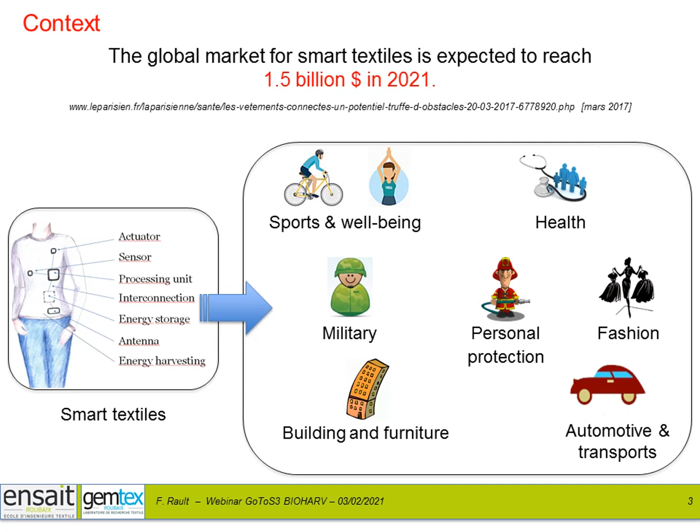The context of the development of PVDF-based textile structures is linked to the development of smart textiles and its economic interest. This market should reach $1.5 billion this year. Smart textiles are textiles able to interact with their environment. Among these smart textiles, some integrate electronic components that require energy. These smart textiles find application in various fields such as sports, well-being, health, personal protection, fashion, building, automotive and transports.

Smart textiles are developed to provide new functionalities. These textiles can monitor different signals, they can heat, communicate, or emit light. To achieve this, these textiles must be supplied with electrical energy.

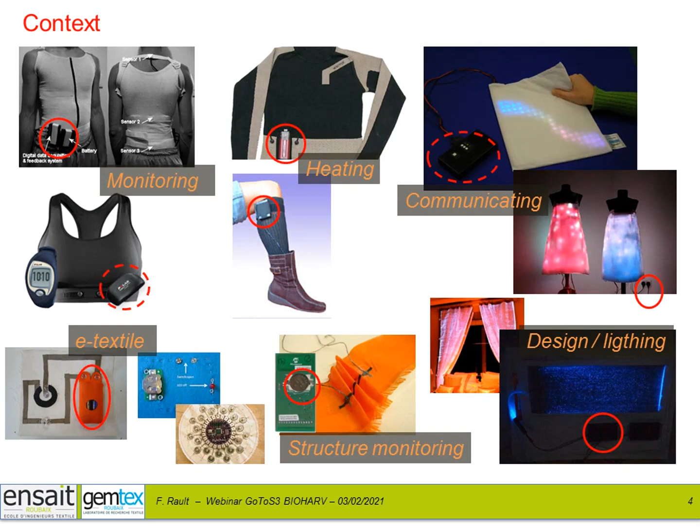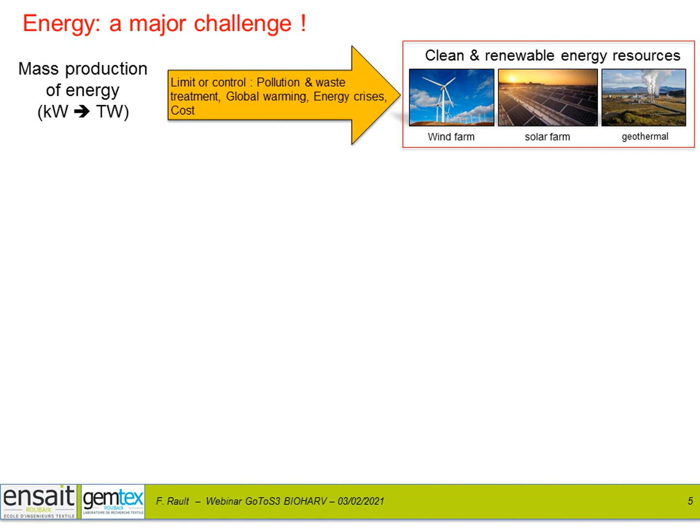Today, energy is a major challenge at all levels, which must take into account a number of issues including the impact on the environment. When it comes to the mass supply of energy, for example to supply an industry or a city, there are alternative solutions to take environmental aspects into account.

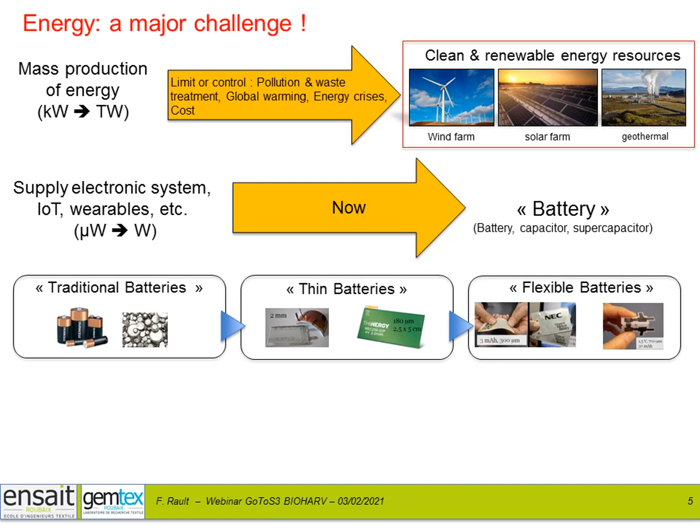To power mobile electronic systems, batteries are currently used in the majority of cases. Traditional batteries can be replaced by thin or flexible batteries, but their use still leads to several problems. In particular, they have an impact on the environment and on the design or the use of the objects to which they are associated.

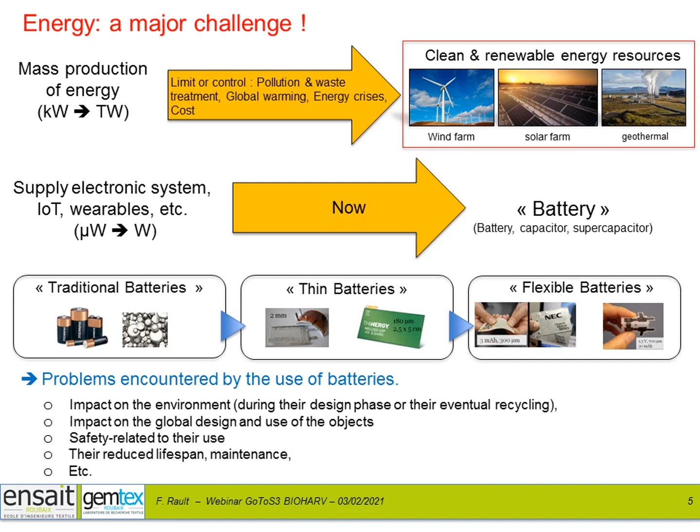One of the ideas to solve this problem of energy is to develop self-powered systems based on alternative energy sources. So the development of energy harvesters appears to be an attractive solution to increase the autonomy of electronic wearables.

A typical energy harvesting unit is usually composed of 3 parts: an energy harvester, a power management unit, and a storage unit. The first important part of this energy harvesting unit is the energy harvester. Its role is to convert ambient energy into electrical energy. This concept of energy harvesting could also facilitate maintenance and limit costs and environmental impacts.

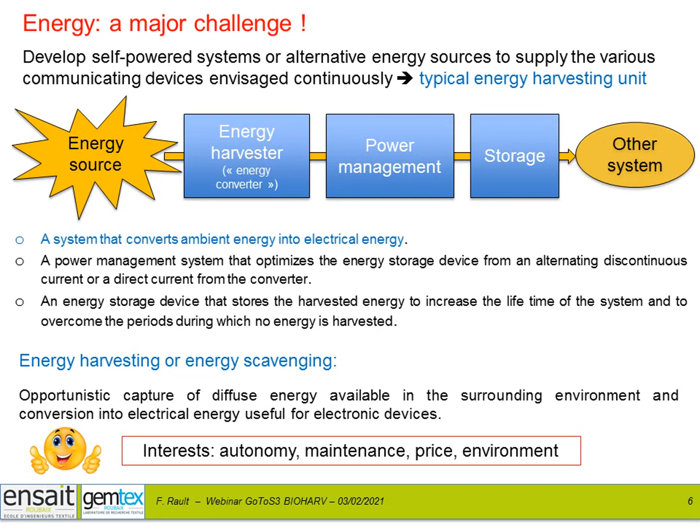Energy harvesters can be integrated into textiles in various ways. Yesterday, classical rigid components were simply added onto the structures, as you can see at the left of this figure. Today, flexible components are stacked to textile which only serves as a support. This is, for example, the case of the implementation of a photovoltaic flexible panel in the picture in the middle.

The future objective is that the textile becomes the energy harvester.

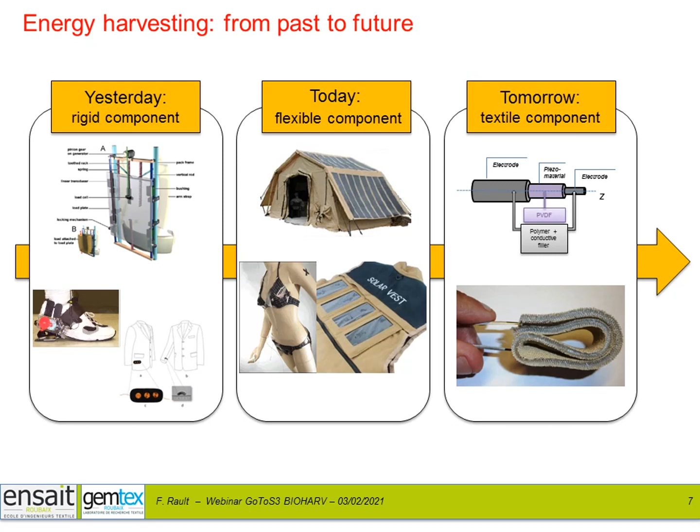The energy to power wearable devices through electrical conversion can come from the environment, from human activities, but also from the body. This is particularly interesting in the case of the development of smart textiles. Electromechanical conversion based on piezoelectric phenomena is then one possibility to consider among all other effects and sources.

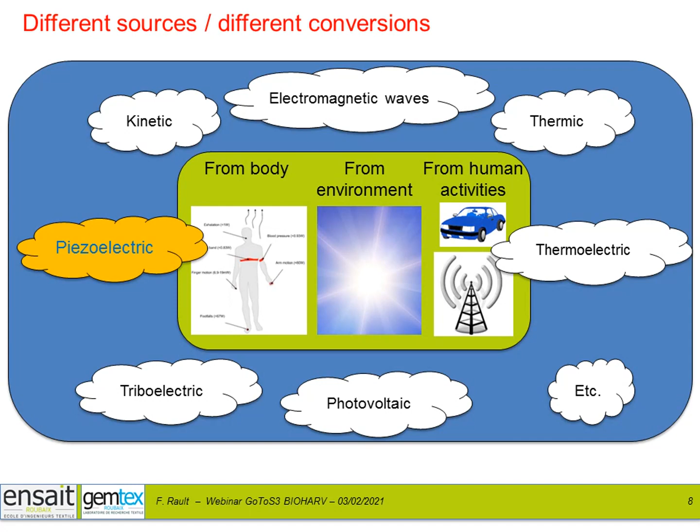In electromechanical conversion, we consider the direct piezoelectric effect. Electrical charges are generated when a piezoelectric material is subjected to mechanical stress. Some ceramics have high piezoelectric coefficients, and some of them exist in the form of fibers. Unfortunately, they are brittle and therefore difficult to integrate into textiles.

In textiles, some studies have been carried out and others are still in progress to obtain piezoelectric textile structures. These studies cover all scales from nanofibers to fabrics.

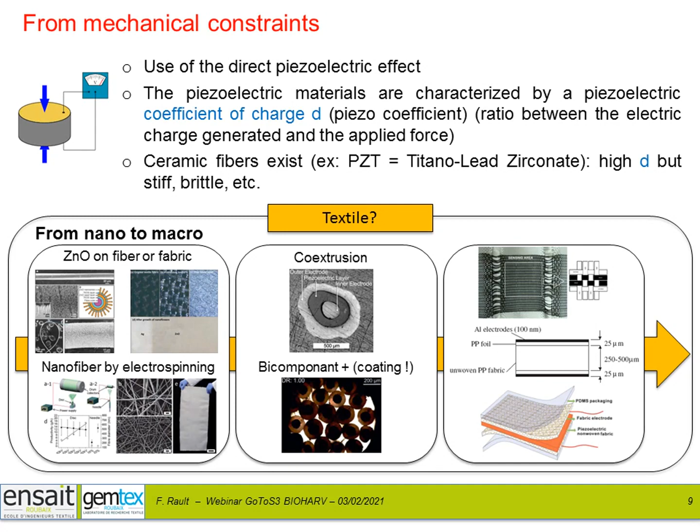The studies on energy harvesting from the piezoelectric effect began at Gemtex laboratory with a self-financed project to discover PVDF. The Tenerife project then enabled us to address the first problems in generating a piezoelectric crystalline phase during the melt spinning process. The Autonotex project aimed to launch the first connected and energy autonomous textile on the market. Studies on PVDF are currently continuing with a PhD thesis on electrospinning.

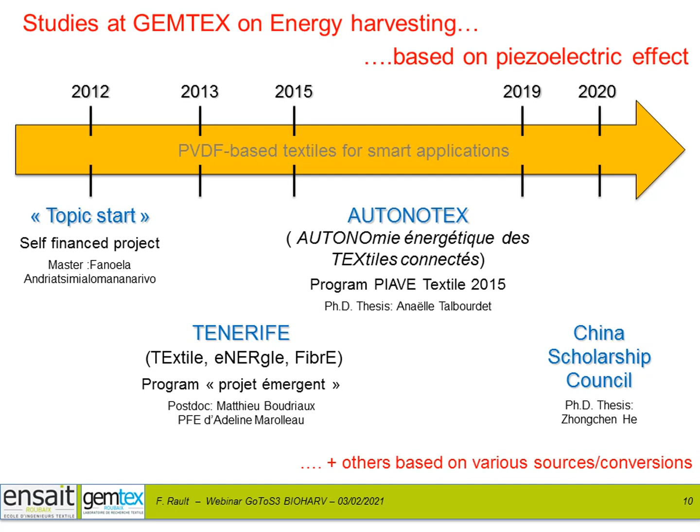We started our research on the development of piezoelectric textile harvesters with two approaches. We have chosen a first macroscopic approach where the issues are the optimization of the yarn, the choice of the textile structure, and the implementation of the electrodes.

We have also studied a second microscopic approach. The aim is to produce a three-component fiber with a piezoelectric core surrounded by two conductive layers. These two approaches, carried out under the Autonotex and Tenerife programs, aim to maximize the piezoelectric character.

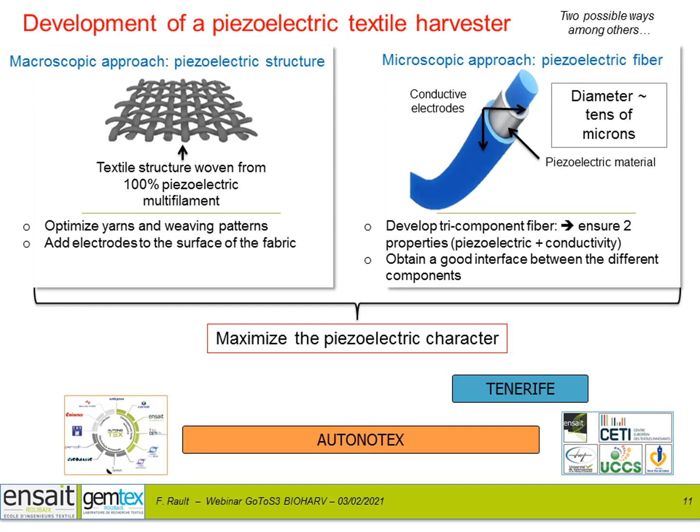Before starting our work, we selected the piezoelectric polymer. There are several of them. We can mention, for example, polyamide 11, PLA, but also PVDF and its copolymers. Among copolymers, polyvinylidene fluoride trifluoroethylene is interesting because it crystallizes directly in piezoelectric form.

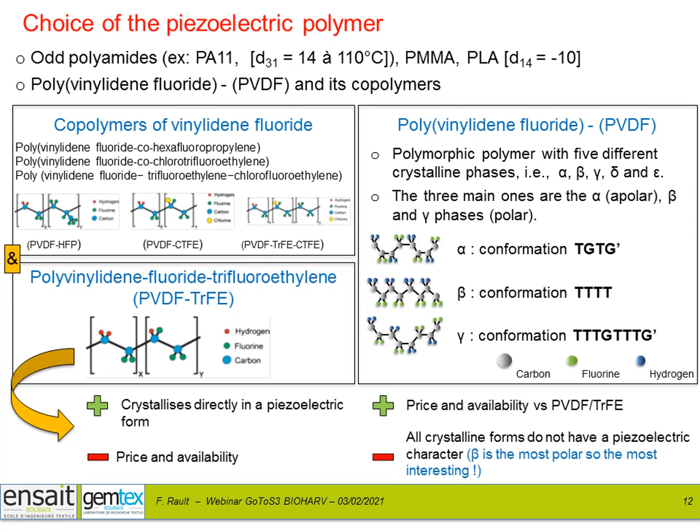Its major disadvantages are its price and the quantities available, which make it difficult to use for mass market applications. PVDF is available in larger quantities and at lower price. However, it has different crystalline forms and not all of them are piezoelectric. PVDF must therefore be mainly converted to its beta form to reach the maximum piezoelectric conversion.

There are several strategies for changing the crystal structure of PVDF. For example, nanofillers can be added to promote the formation of the beta phase. It is also possible to influence the crystalline phase conversion by adjusting the process parameters during the melt spinning. The drawing ratio is therefore an essential parameter to consider.

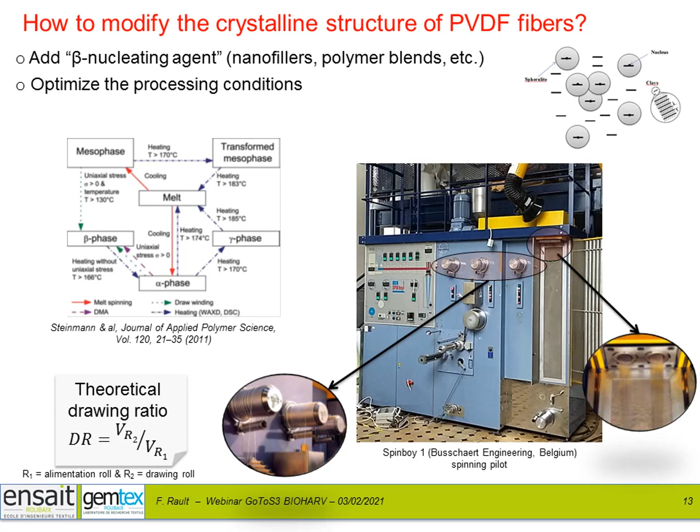In the Tenerife project, we have notably studied the influence of the addition of clays and its different elements, trying to dissociate the impact of the inorganic part and the organic modifier. The main conclusions are that the organic modifier can be interesting for low drawing ratio. However, a too high content of nanoclay limits the drawing ratio, which is the principal factor to reach high beta phase content.

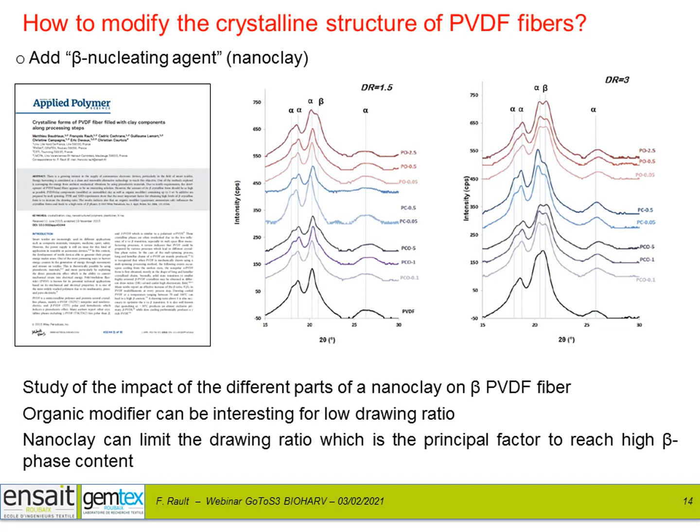In the Autonotex project, we again studied the optimization of the beta phase content of our filaments by adjusting the conditions of the melt spinning process. To achieve this, we carried out online monitoring of the crystal structure using Raman spectroscopy. This allowed us to select the process parameters more precisely.

Nevertheless, one of the main issues remains: the poling of the filaments.

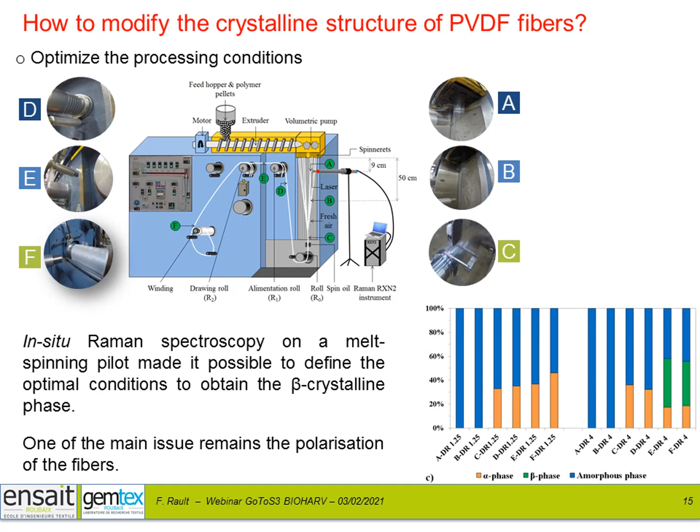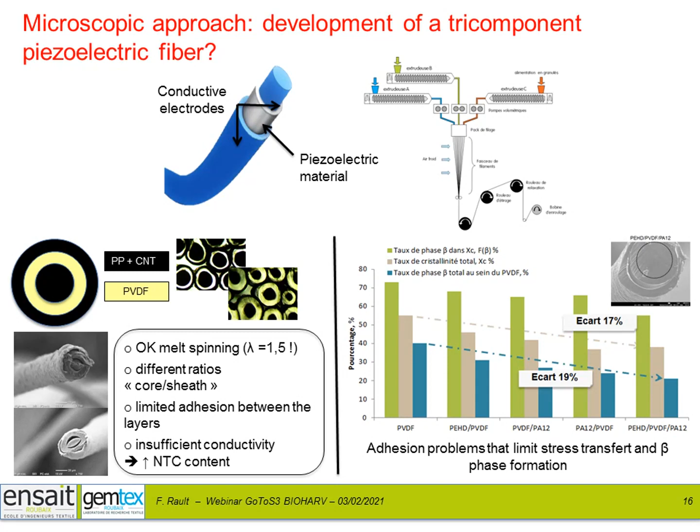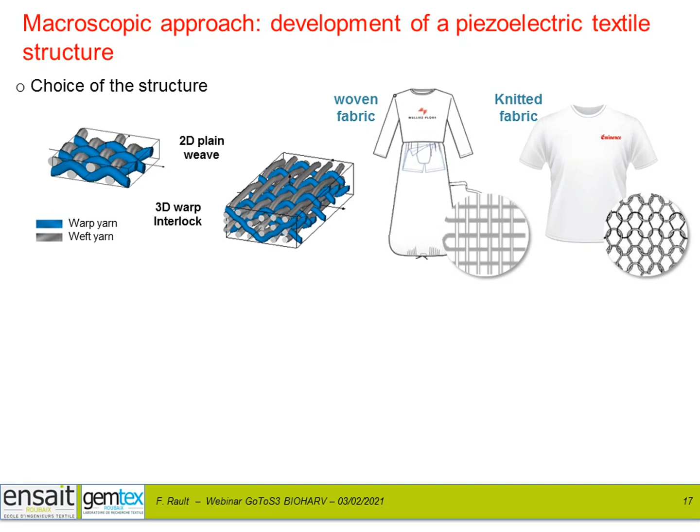For the macroscopic approach, we use 100% PVDF filaments with an optimized beta phase content. We worked on the choice of the textile structure to be able to solicit the maximum of filaments during mechanical stress. Our objective is to harness the maximum of electrical charges.

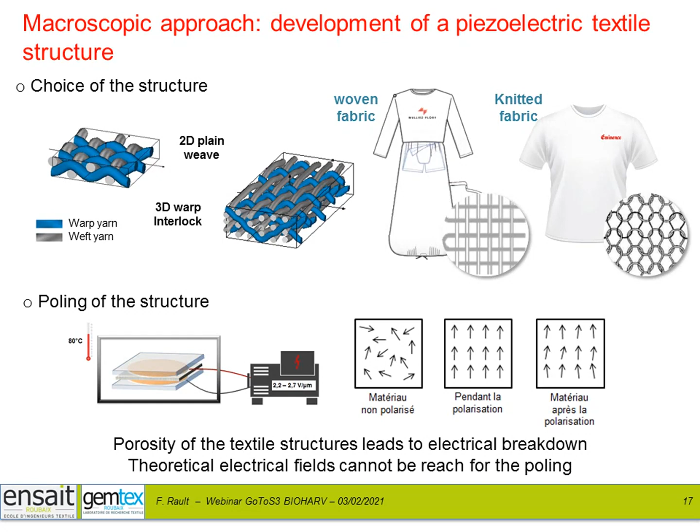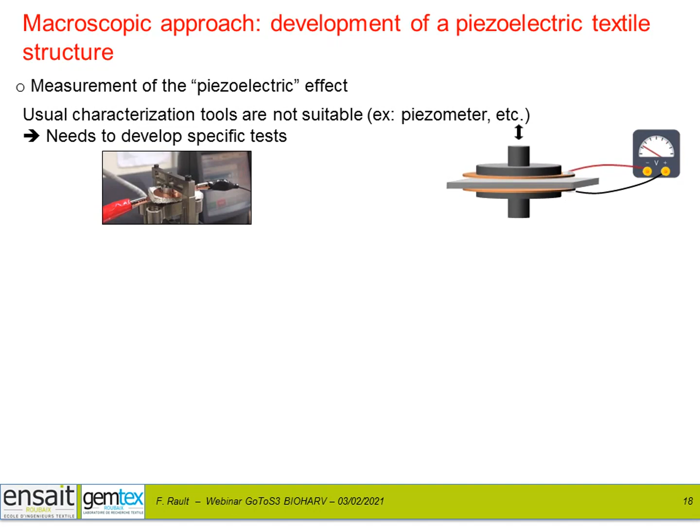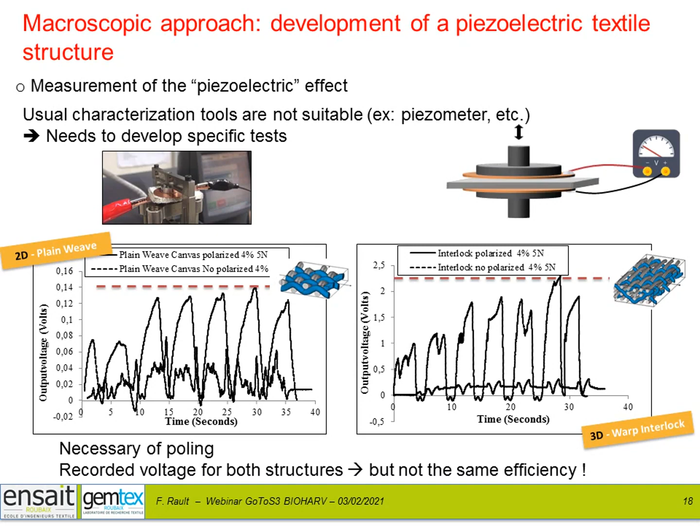To conclude this presentation, we can say that PVDF-based textile structures represent an interest in various fields in smart textiles, for example for energy harvesters or alternatively as a sensor. It is still possible to optimize the beta phase content of PVDF fibers by modifying the condition of the spinning process. Concerning the three-component filaments, this is an interesting architecture, but there is still a lot of work to perform.

For example, there are still some difficulties to ensure the adhesion of the different layers to guarantee sufficient stretching to obtain beta phase. It is also difficult to reach the electrodes due to the fineness of the filaments. So one solution could be to increase the fiber diameter, but it will be necessary to change the process. In consequence, maybe it could be interesting to add nucleating agents to promote the beta phase content due to the limiting drawing ratio, which can be obtained with a new process.